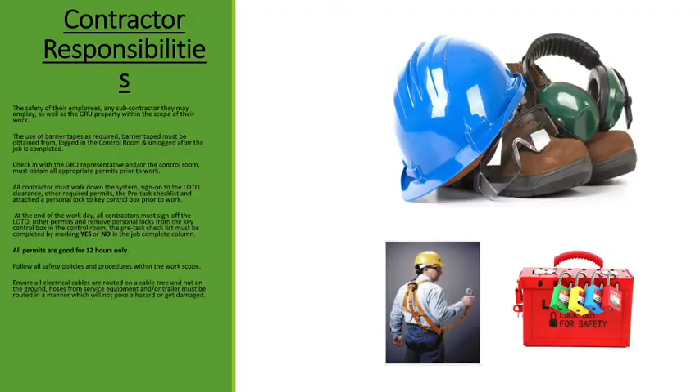Please park along the side of the roadway in the grassy area as indicated by posted signs. Trucks needed beyond the contractor general parking area shall request a parking pass from the GRU representative, and it must be displayed on the windshield of the vehicle.

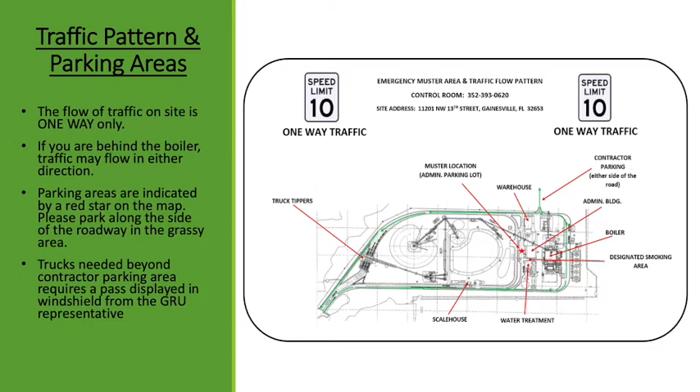The following rules apply to passenger vehicles: sitting or standing in the bed, on running boards, tailgates, or toolboxes is prohibited. A vehicle operator shall use a spotter if visibility is impaired when backing up.

Unattended vehicles are to remain in park. Large service vehicles' wheels must be chocked when parked. Running vehicles shall not be left unattended. Passenger vehicles may be subjected to search by authorized GRU personnel.

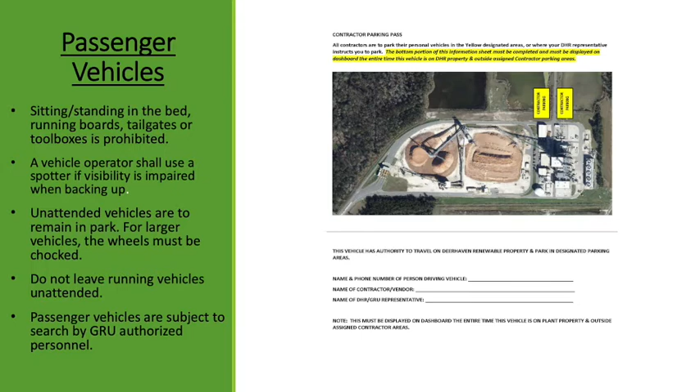Heavy vehicles. Personnel who operate cranes, other heavy vehicles, and forklifts on GRU sites must have a valid certification. These types of vehicles must be chocked while parked.

Designated smoking area. There is one designated smoking area in the plant, located between the administration and water treatment buildings. Please ensure cigarette butts are extinguished and disposed of in the receptacles provided.

Use of smokeless tobacco products is as follows: smokeless tobacco use inside GRU buildings is not permitted.

Spitting smokeless tobacco in trash cans or on the floor is not permitted. Spit must be collected in a container that must be capped before disposal, such that others handling trash will not be exposed.

Severe weather. GRU employees and contractors working outside will be alerted in the event of severe weather. You will hear an air horn alert to take cover. Three air horn blasts and/or a PA announcement will start the stand down from outside work.

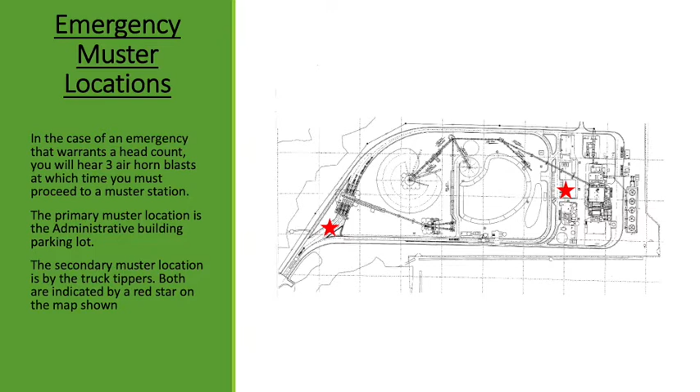Safety data sheets. All contractors must provide an SDS for all chemicals brought on site. A copy of SDSs are located in the control room. SDS information can also be accessed at msdsonline.com.

Overhead danger. Be aware of overhead work. Look up prior to walking under conveyors. Areas below overhead work must be barricaded off with danger barrier tape to protect other employees from potential falling objects.

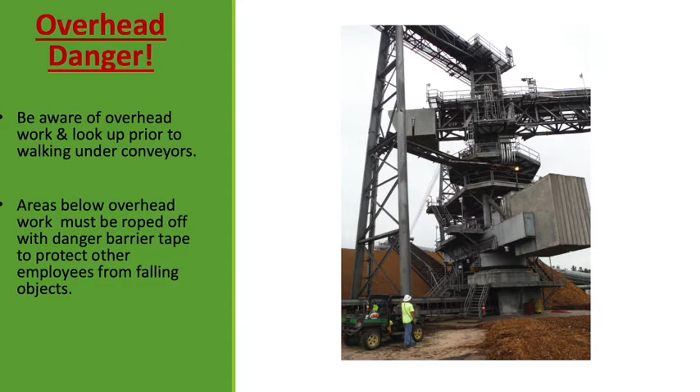Personal protective equipment. Contractors are responsible for providing and maintaining all required PPE for their employees and subcontractors. All PPE must be ANSI ASTM approved. Hard hats are required 100% of the time in the designated areas. ANSI approved hearing protection must be worn at all times in designated areas. Earplugs are located at the front and back door of the administration building. Please see a GRU representative for additional PPE while working on site.

Fall protection and elevated work. Fall protection is required by employees and contractors whenever exposed to a potential fall 4 feet or greater: working on a fixed surface or permanent structure 4 feet or greater off the ground, working on scaffold staging with more than one level, working from or traveling in aerial equipment such as aerial lifts or man baskets, or working on portable ladders above 24 feet.

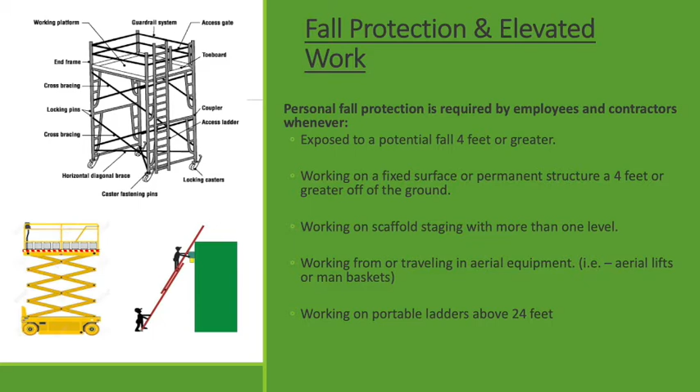Please note the following scaffold and work platform requirements. Competent persons, as defined by 29 CFR 1926.450 Part B, must be designated to supervise the erecting, moving, dismantling, and alteration of scaffolds. A competent person shall check all scaffolding each shift prior to use to ensure it is of sufficient strength and rigidity to safely support the weight of workers and material to which it will be subjected.

Handrails and toe boards are required whenever a fixed working surface is 4 feet or greater off of the ground, or for scaffold with staging more than one level.

Scaffold inspections. Scaffold should be inspected by a competent person daily prior to use by employees and/or contractors, and must be documented on the inspection tag.

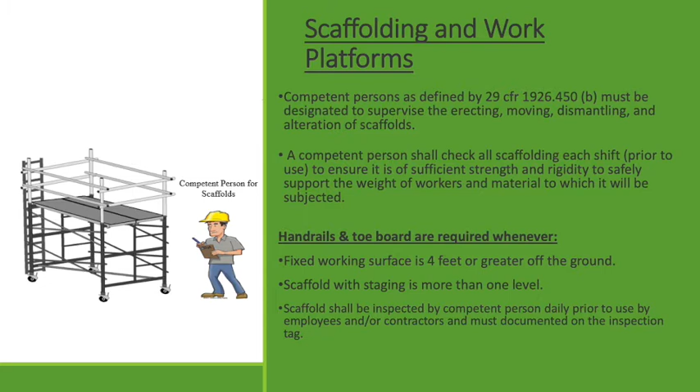Requirements for floor holes and openings. One of the following methods, listed in order of preference, must be used for protecting personnel from falling through floor openings and holes. Method 1: erect a guardrail system around the floor holes and openings capable of withstanding 200 pounds of force, and mark the floor hole with a sign.

Method 2: cover floor holes and openings with a double plate cover designed for 2 times the intended load. The cover must be marked as a floor hole.

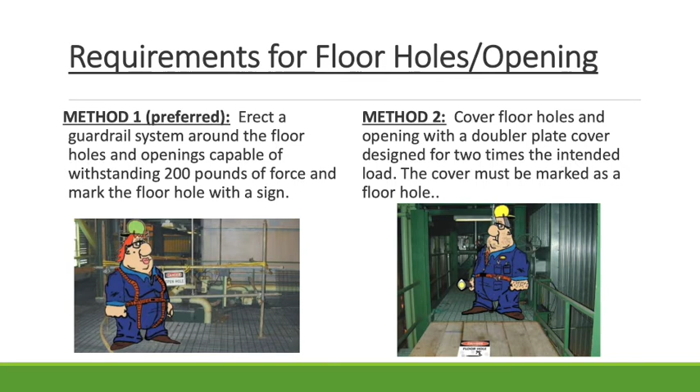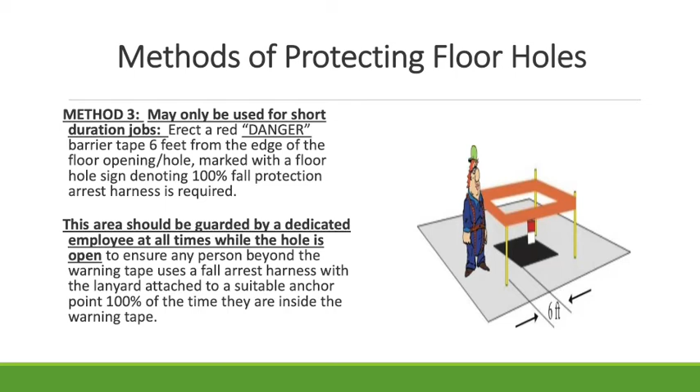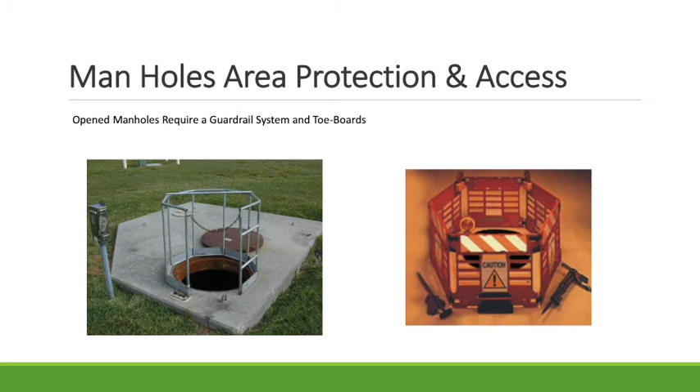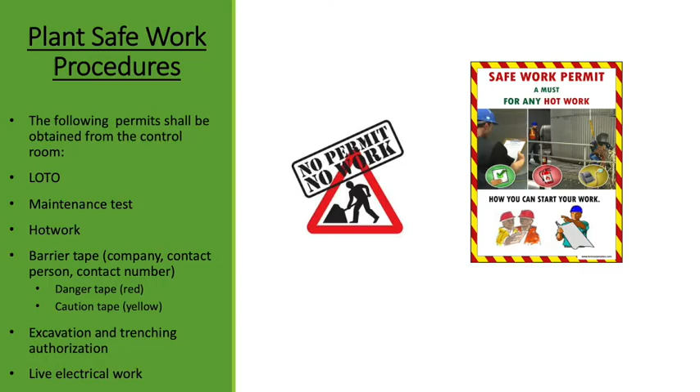Pre-task checklist. A pre-task checklist shall be used to identify hazardous work conditions and to specify the procedure and equipment required to perform the work. A pre-task checklist shall be completed and must be signed by each worker daily prior to work. Pre-task checklists will expire 12 hours after issue.

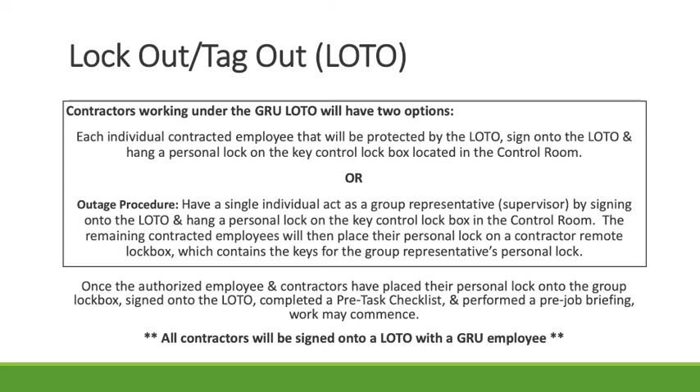All contractors must provide their own personal lock with the following information: contracted employee's first and last name, company name, and cell phone number. Note: all LOTOs must be signed off and personal locks removed from the key control box in the control room at the end of each workday.

Hot work permits and fire protection. Hot work permits are required for all work which has the potential for producing a spark or other ignition source, including but not limited to welding and cutting, core drilling, grinding, chipping, and saw cutting concrete.

Contractors are expected to provide adequate fire protection, such as fire protection blankets and a dedicated fire watch with extinguishers on standby while performing hot work. The work area must be kept clean and free of debris. Combustible waste shall not be present during hot work.

Contractors are required to provide their own fire watch. Fire watch duties shall continue at least 30 minutes after hot work is completed. Ensure the area is cooled and there is no visible smoldering or smoke present. Hot work permits will expire 12 hours after issue.

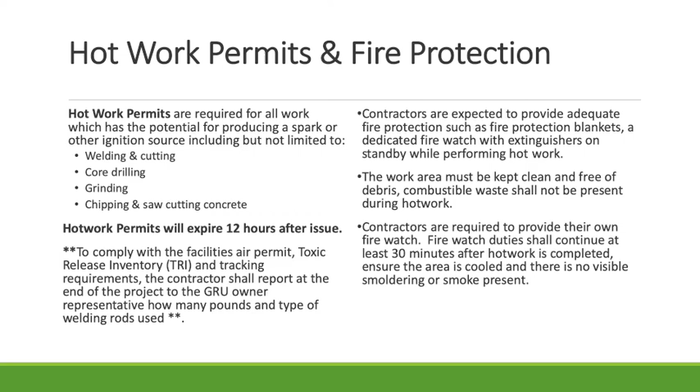Confined Space Permit. All employees and contractors shall comply with the GRU Energy Supply Confined Space Entry Program to control and protect personnel from exposure to confined space hazards, including entrapment, engulfment, and exposure to an immediately dangerous to life or health (IDLH) environment. The Confined Space Entry Supervisor is responsible for the safe movement of personnel in and out of a permit-required confined space.

The Confined Space Entry Supervisor ensures that acceptable entry conditions exist, supervises the attendant, oversees entry processes, coordinates work between different work groups or contractors, and terminates entry as required.

The attendant is responsible for monitoring, managing, and recording the movement of personnel in and out of a permit-required confined space, reporting to the entry supervisor. Typically, the attendant is stationed immediately outside the entrance of the space.

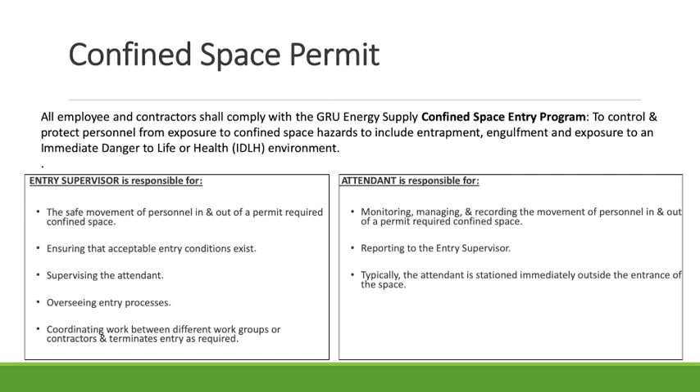Heavy load lifting. Ensure the planned lift has been communicated to all affected employees. Ensure a load lift plan is used. Ensure the load has been properly rigged. Verify the operator and signal person understand the communication method to be used, such as radio or hand signal. Verify the operator and signal person have a clear view of each other and the load where necessary. Supervise the lift until complete.

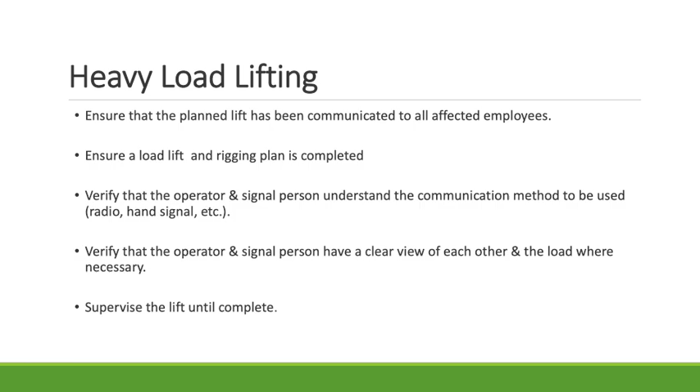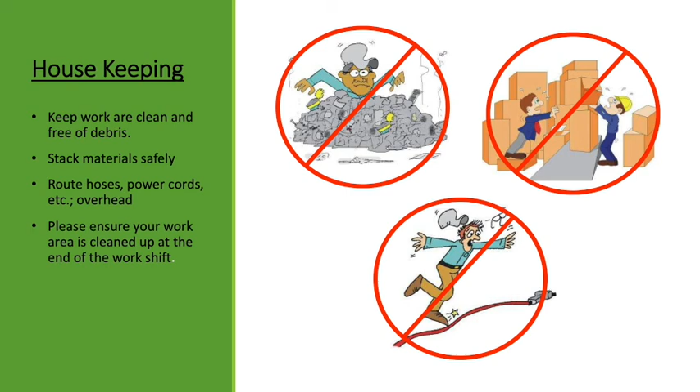GRU regards safety as a value, and we encourage our own and contracted employees to be safe for the right reasons. Every day of our lives, at home and at work, we make safety decisions.

Do I stand on that chair to reach the light bulb, or do I go to the shop and get a ladder? Do I look at that text that just came on my phone while driving, or do I wait until I am stopped?

Safe for the right reasons asks us to think about four people in our lives that would be affected if we were injured or killed because of our unsafe actions.

While working on this site, another work site, traveling, or working at home, please take a minute to think about your four. Share this with your coworkers and remind others by showing your four.